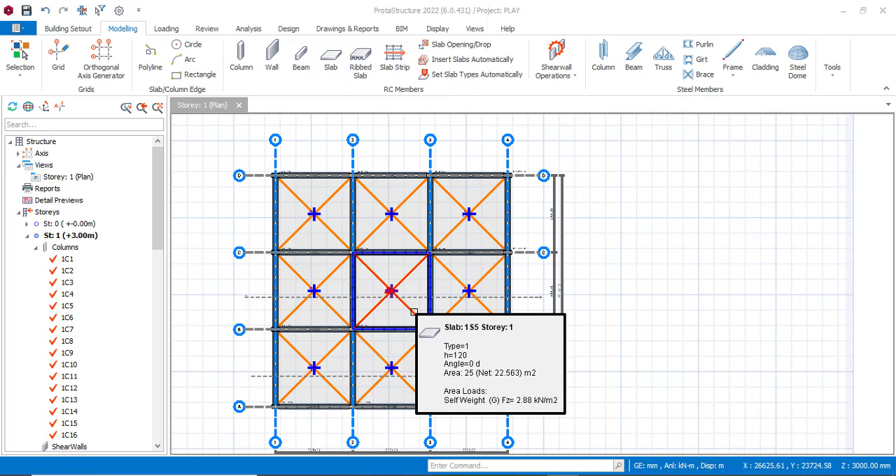In this tutorial, I would like to show you how you can correct your slab in Prota Structure when it fails the deflection check. And I will definitely provide a solution as thoroughly as possible.

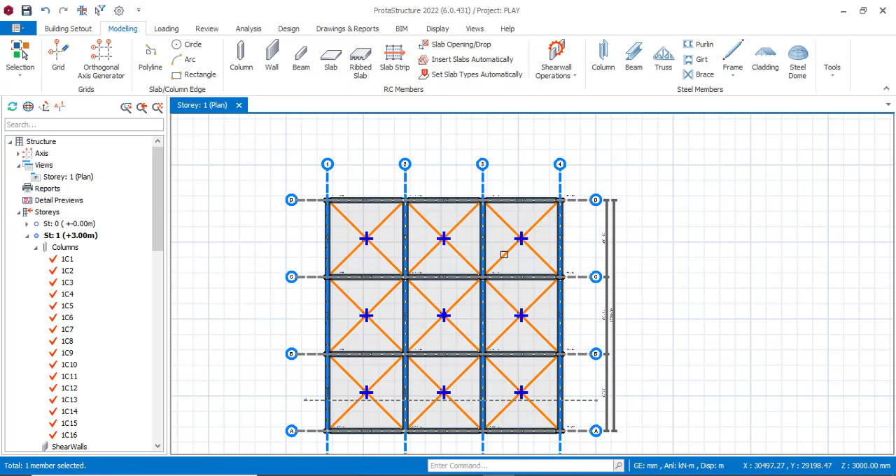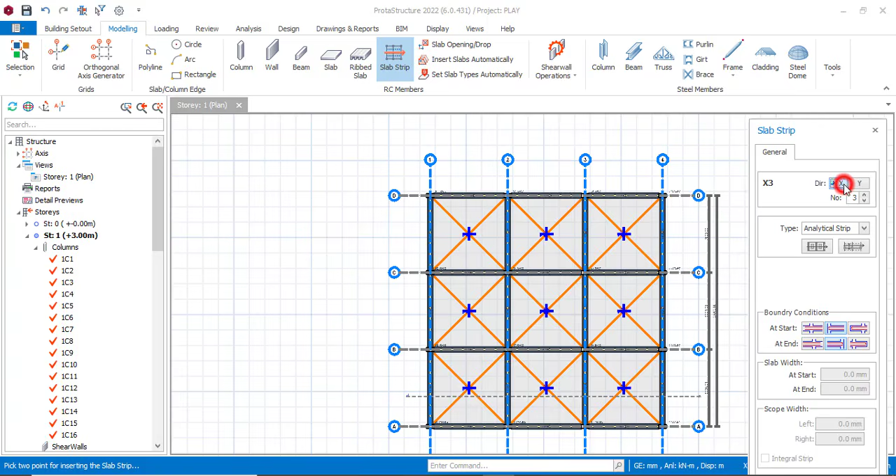Now we will begin by creating a strip for all the slab, because in Prota Structure it is the strip that you will use to analyze and design your slab. Alright, so we have three types of strip: there is analytical strip, there is FE strip, and there is manual strip. So in this case I'll be using analytical strip, and then for the X direction I will start from this one at the top here, and then I can hold my Control so that I can have a straight strip. Then I'll just left click.

Now you can see what I have. It says deflection check L/D equals to 56.18. This 56.18 is the actual span depth ratio of this panel, which is panel 1S1. And you can see that that is greater than 52.0, which is the limiting span depth ratio. So the actual should not be greater than the limiting, and we are having a problem with deflection here. You can see section insufficient for this particular panel or this particular slab 1S1.

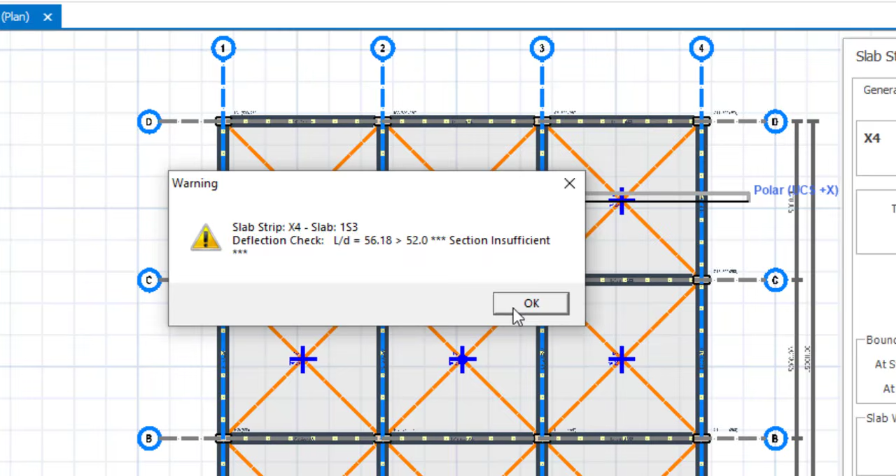So I click on OK. You can see for 1S2, which is this second panel, I'm having the same problem. You can see this is popping up because we have a single strip running over 3 panels. So I'll click on OK, and then I have the same issue for the third panel. So click on OK, and that's all. So I'm having a deflection problem with 3 panels over there. Okay, we can stop it for now.

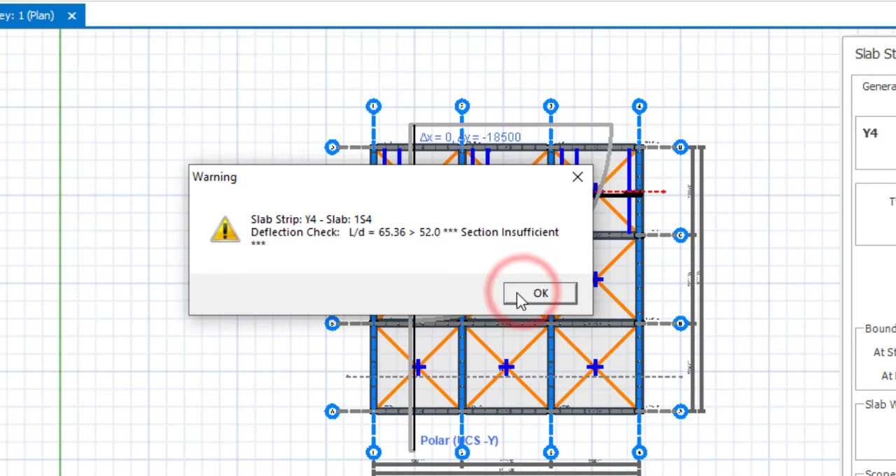Then I can go to Y, and then let me run one from this side, and then let me drop it over here. So I'm having the same issue, but this time around it is even greater. You can see this is 65.36. Okay, so click on OK, click on OK, click on OK. All right, and then you can close this.

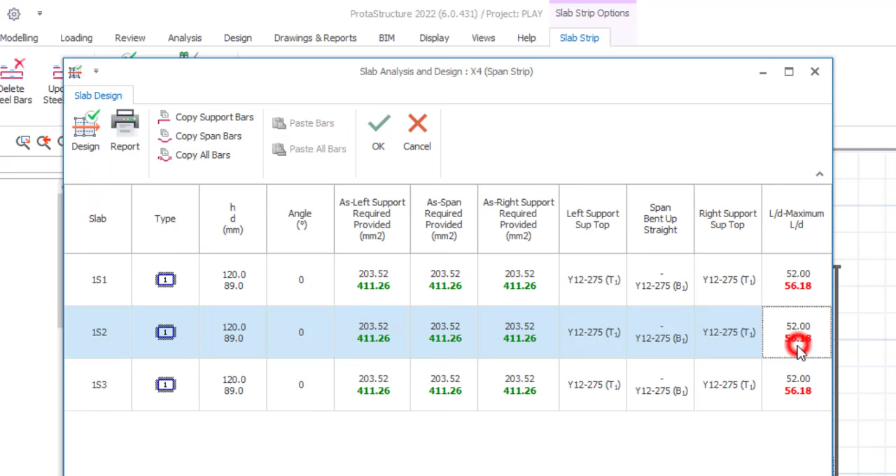You can always monitor the value of your limiting span depth ratio, the actual span depth ratio, the depth of your slab, and many more. So to do that, I'll click on this strip, and then I can go to slab strip design. Then you can see it here. I have 56.18, that is the actual span depth ratio. 56.18, also this other one 56.18, and this last panel 56.18. Okay, now this is the solution we are going to provide.

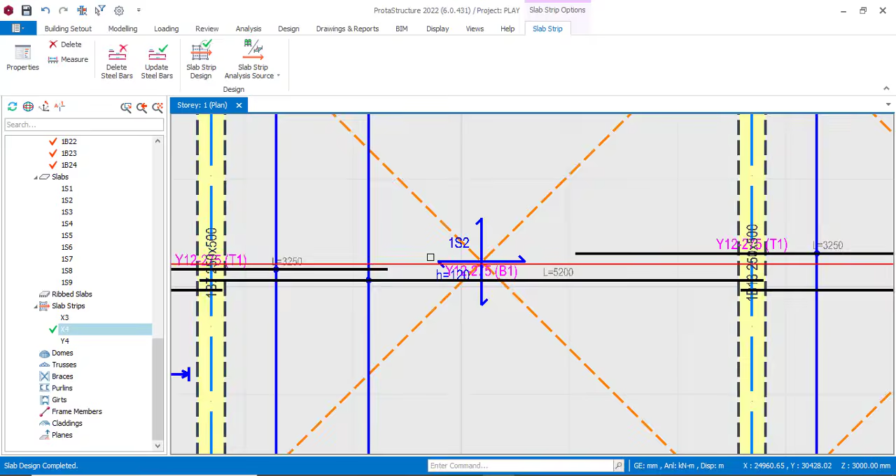Now usually when your slab or your beam or any flexural member is having a problem with deflection, the most common and the most significant solution is to increase the thickness. However, increasing the thickness is not the only solution you can provide. Specifically, the slab thickness here is 120. You can see the thickness here is 120.

So let's say I do not really want to increase this beyond 125, or let's say 130. What if I increase it to the maximum thickness I want to use, and at the end of the day I'm still having a problem with the deflection? Is there any other thing I can do? Of course there are other things you can do, so I'll be providing you 2 solutions here.

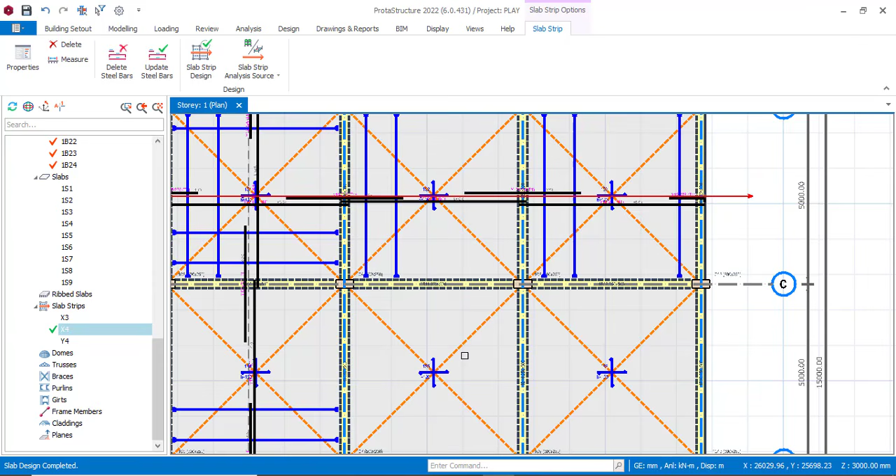One is you can increase the thickness, and the other one is you can reduce the spacing of your reinforcement. So you can actually provide the two. So you take a little bit of this, a little bit of that, and then you add it together to get a solution, so that you don't necessarily have to increase the thickness of your slab too much.

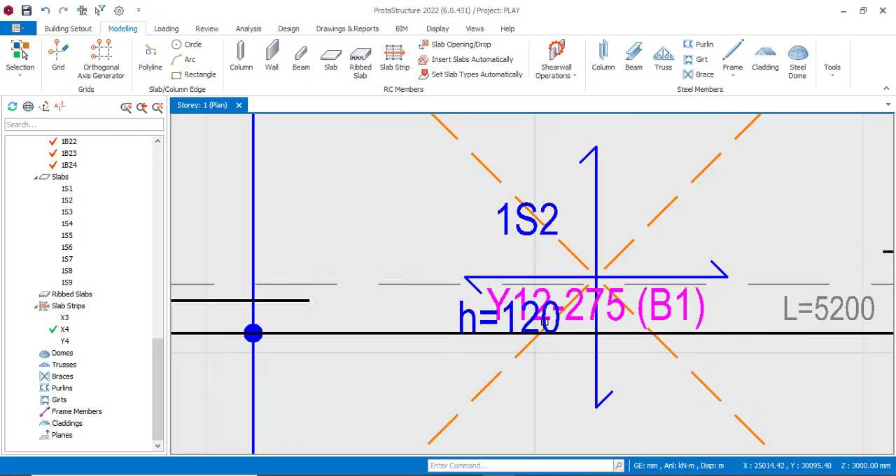Now if you check this, you see the spacing I have here is 275. Let's see for the span reinforcement as well. I have 275. What about the support reinforcement here? I have 275. The span 275, the support here 275, and then the span here I have 275.

So I have 275 spacing for all of these reinforcements, both the span and the support reinforcement in this first strip. So now if you reduce the spacing from 275 to, let's say, 150 or 175, by reducing that, you will definitely be increasing the area of your steel.

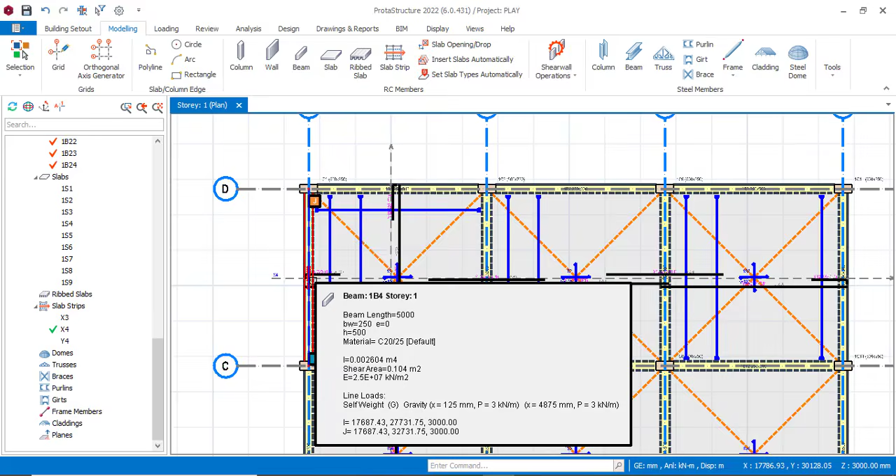Okay, so that tells you that the moment you are increasing your spacing, you are reducing your area of steel. And when you are reducing your spacing, that means you are increasing your area of steel. So now we can reduce our spacing so that we can have an increase in our area of steel.

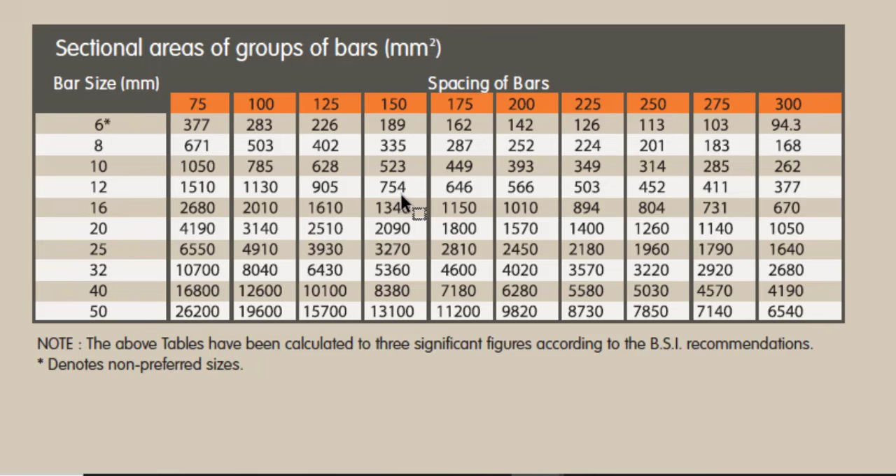For example, in this particular slab, I am using Y12 at a distance of 275. You can see my area of steel is 411 mm squared. Okay, so now if I reduce the spacing from 275 to, let's say, 150, you can see what my area of steel will be. It will be 754. So I have increased from 411 to 754 by reducing the spacing.

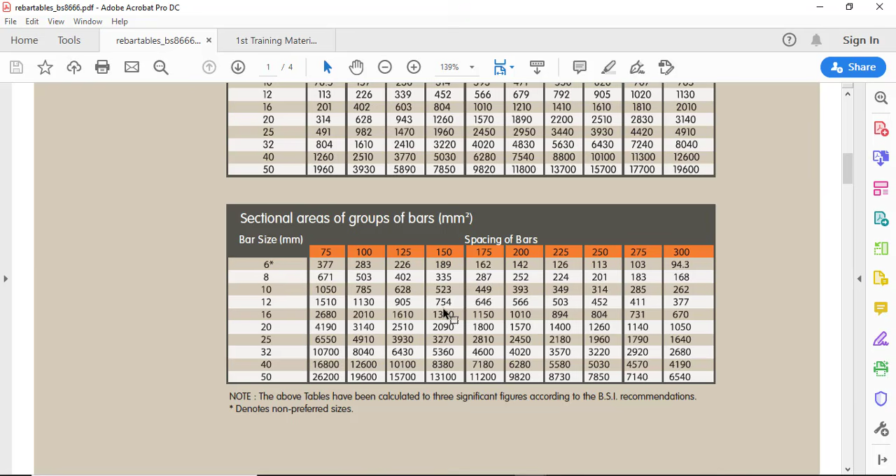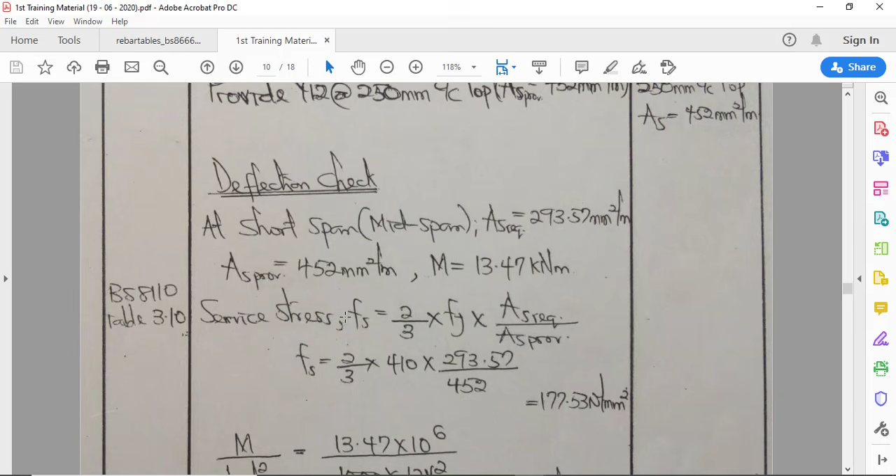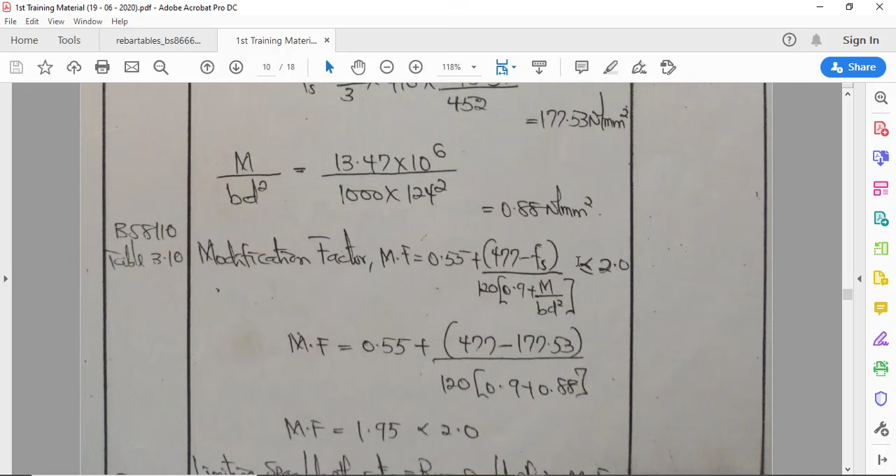Now you can see the relationship is inverse, which tells you that the higher your area of steel provided, the smaller your service stress. So when you achieve a small value of your service stress, that is good, because it will lead to a high value of modification factor. Your modification factor may be very close to 2.0, or it may even land at 2.0 when you have a small value of service stress, because you'll be subtracting that service stress from 477, which is a constant.

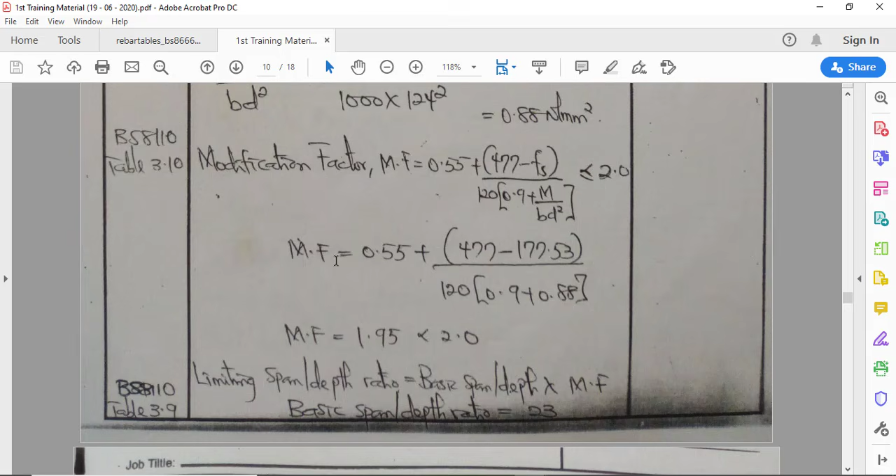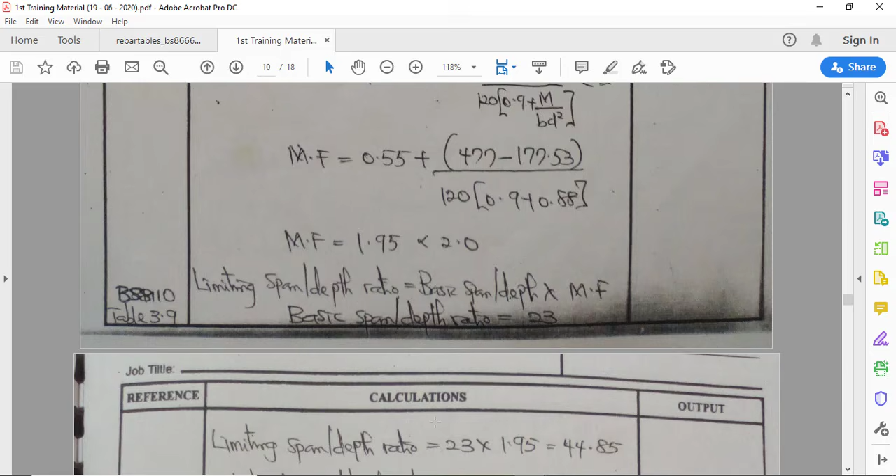Okay, now when you have a high value of your modification factor, you'll be multiplying that with your basic span depth ratio, and that is what will be your limiting span depth ratio. So if you have a high value of modification factor, you have a high chance of having a high value for your limiting span depth ratio. When your limiting span depth ratio is high, then you have high chances that your actual span depth ratio will not exceed your limiting span depth ratio. I think that is clear. So this is how reducing your spacing will influence your deflection.

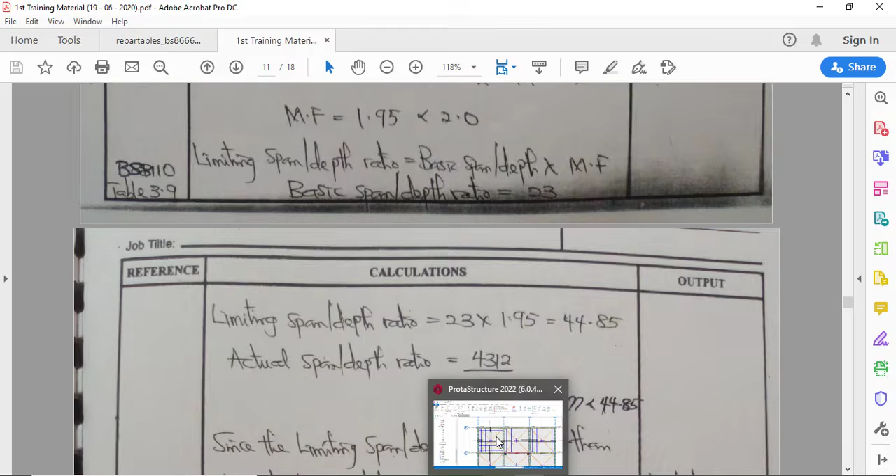However, reducing the spacing of the rebar will not influence the deflection of the slab as significantly as increasing the thickness of the slab will. And that is why I am providing the two solutions in this video. Alright, so now we can go back to ProtaStructure. Now I have 275 mm spacing. I am going to reduce it from 275 to 150 mm spacing.

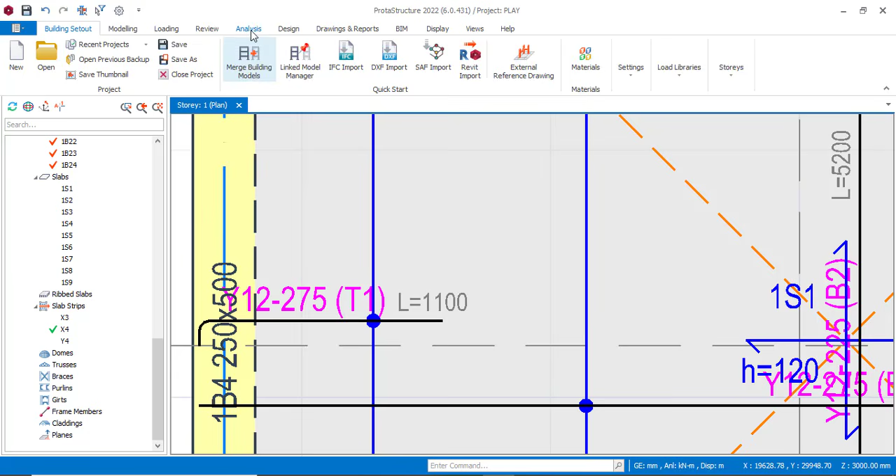Alright, so to do that, you can just go to building setout, then you go to settings, then you can come to setting center. You can actually do it in a different way. For example, you can go to analysis, then building analysis, and from here you can go to setting center. All that matters is you should be in setting center. Now I can come to slab because I'm interested in slab. Now you go to rebars.

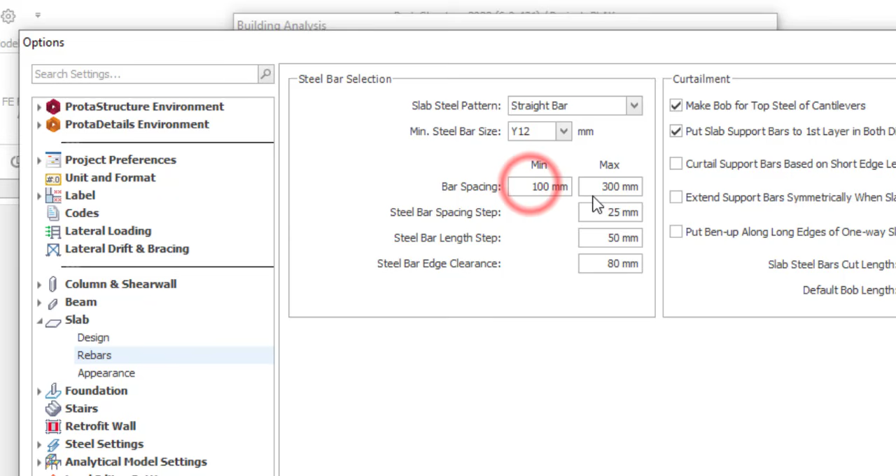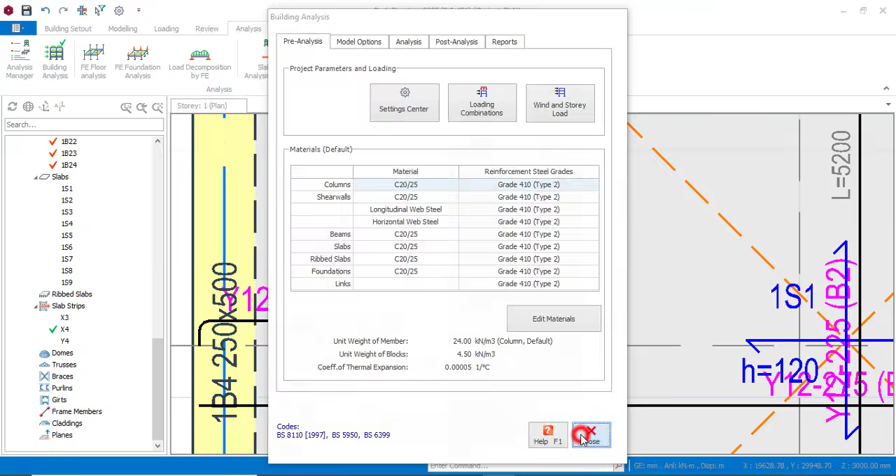Now under the bar spacing, you can see you have the minimum and the maximum. The maximum here is 300. Now I'm going to reduce it from 300 and just put 150. So 150 will now be the maximum spacing for my reinforcement of the slab. So click on OK and then just close this. Now this will not change at the moment. All you need to do is right click and then click on update steel bars. Okay, so click on OK.

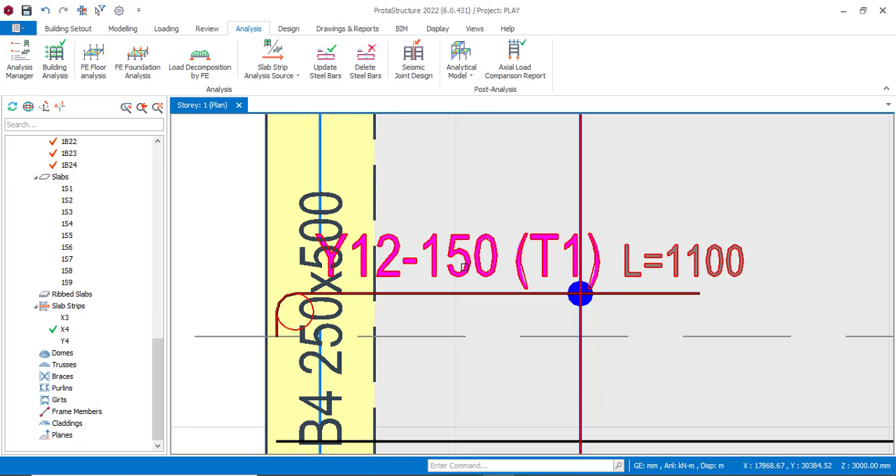Now when you do that, you will realize that this has changed from 275 to 150. Alright, so now when you check back your reinforcement, you might realize there is a change and there might not be a change, just as I've mentioned earlier, that it will not significantly affect it, because this is a software. It works with approximation, it works in a constraint.

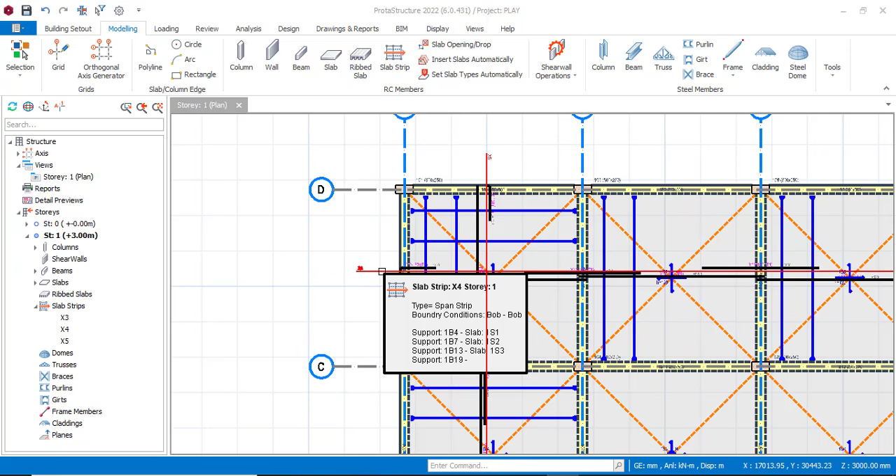Okay, but of course if it is a manual design, there will be a difference in the calculation, and because you are the one who is designing it, you can actually manipulate it the way you want. But this is a software, it will work with approximation and constraint. Okay, so let's see this particular one. Let me click on this strip and then I can go to slab strip design. Originally it was 56.18 and right now it is still 56.18, so this did not change at all.

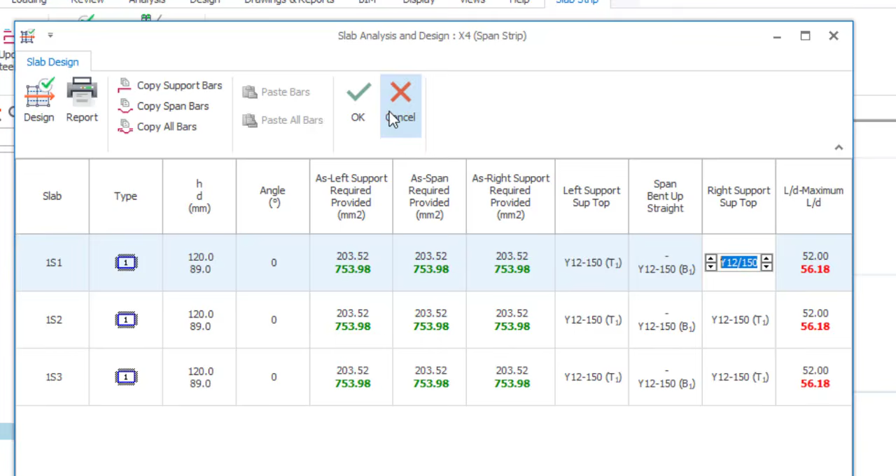Okay, so click on OK, and now if I click on this, I know this was 63 point something, so go to slab strip. Now you see this has changed from 63 to 56.18. Okay, at times if this did not change, you might have to reanalyze your slab. You go ahead to reanalyze your slab and then you update your steel bar reinforcement one more time. You just go to Building Analysis, you rerun your analysis, and then you will update your steel bar.

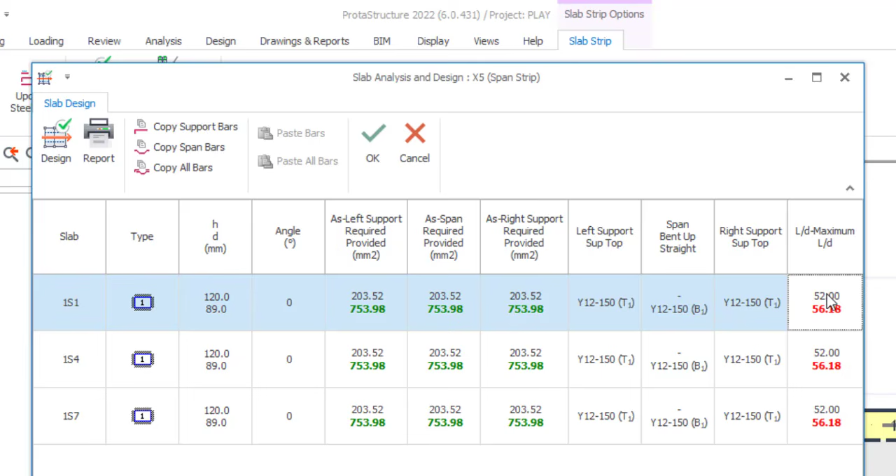Maybe this will change. So if it does not change, that means it is not changing at all, but it might as well change. As you can see, this has changed from 63 point something to 56.18. Now you can see that at least you've reduced it. It is still a failure because your actual span depth ratio is still greater than your limiting span depth ratio. However, it has reduced it from 63 to 56. Okay, so just click on OK, and now the next solution will be to increase the thickness.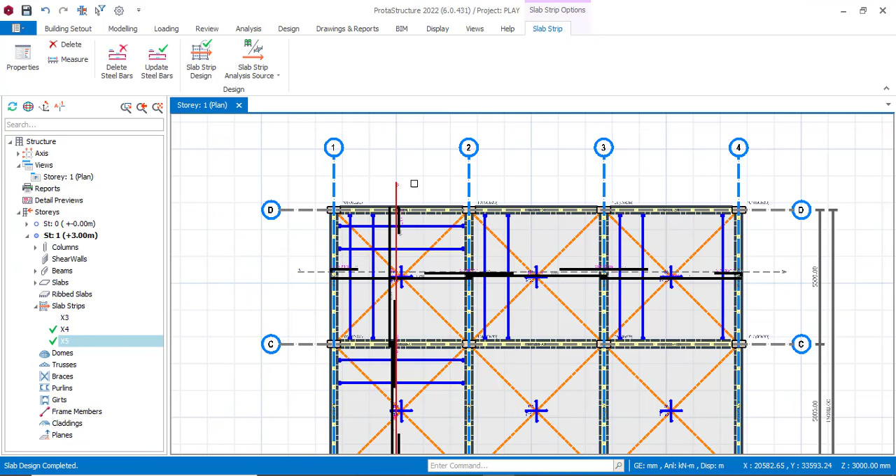So you can see we are taking little of that and then little of this, so we do not have an exaggeration in increasing our thickness. And just as I've said, increasing the thickness is the major correction you can make to your flexural member when they have a deflection problem. Okay, so to do that, just right click on the empty space like this, and then you can go to member table. Now I will go to slab table.

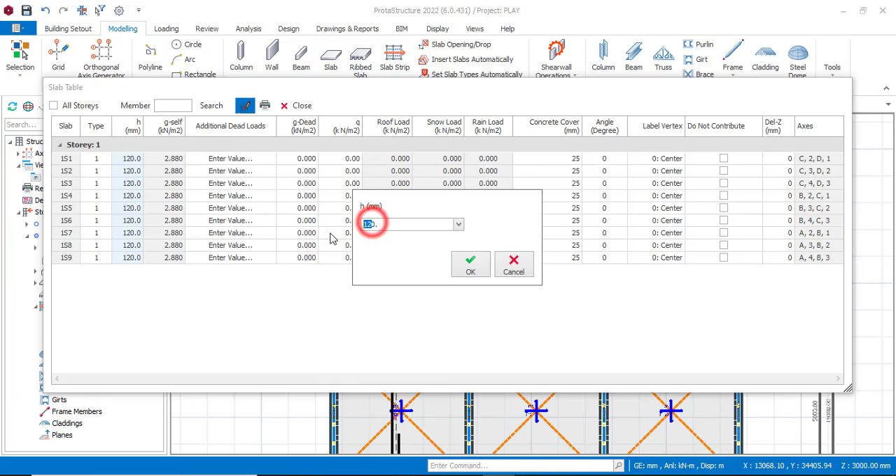I will increase my thickness from 120. It says this will affect my analysis. There's no problem, just click on yes. So I will change this from 120 to 130. Okay, so you can see I've just added 10 mm. All right, and then you can close this, and now you can rerun your analysis. I'll be quick about this.

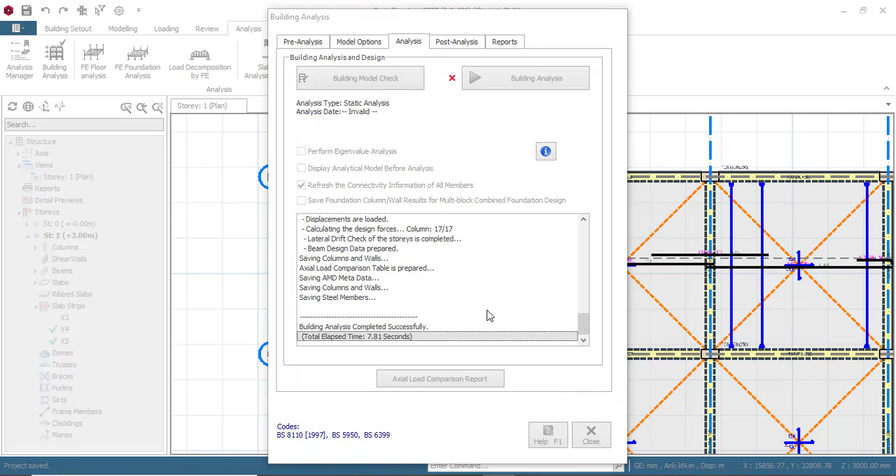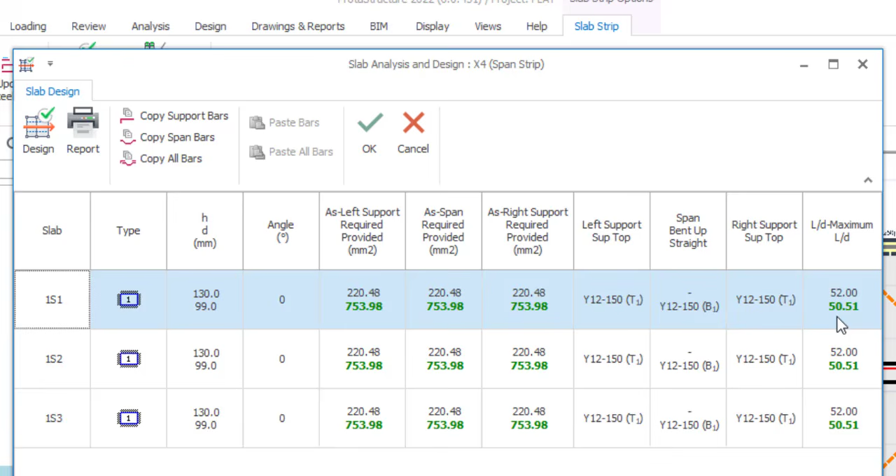Design is always a trial and error thing. It is not just a one-way thing. You have to modify before you get a solution that you are comfortable with. So click on OK. So now I believe we should have a good value. Now I'll just click on this strip and then go to slab strip design. So now you can see that my limiting span depth ratio is now greater than my actual span depth ratio with a value of 2. It has no unit, it is unitless, so it has a higher value. So that is perfect. Just click on OK.

Let me check for this other one in the y-axis. So click on slab strip design, and then I think that is the same. So this is doing fine. You can click on OK. Now at the end of the day, we've corrected the deflection problem of this slab. So this is how you go about correcting your slab when it fails the deflection check.